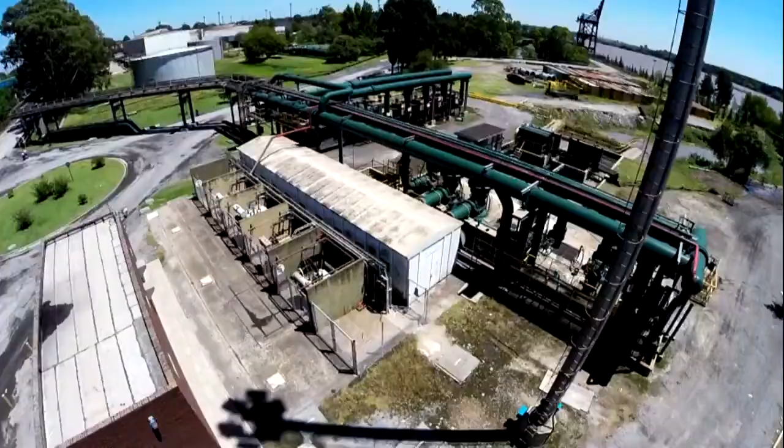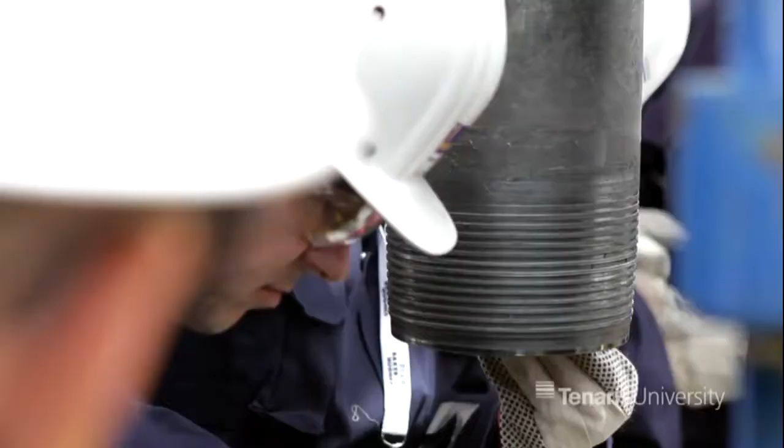As we said before, pipes are formed by the pipe body itself and the connections. Now that we have understood what the pipe body is, let's see what a connection is and which the different types of connections are according to the different applications. Basically, a connection is a mechanical assembly that joins two or more pipes together to form a string. The connections are mainly related to threads, and all the connections in OCTG pipes have a pin and a box.

But why is a connection necessary? If we had one single and continuous pipe long enough to reach the required depth of the well from the surface, there would be no need for connections. However, due to practical restrictions and manufacturing limitations, the pipes must be produced in a specific length range, and those pipes must be made up together through connections.

The connections must meet different requirements such as structural integrity, sealability response, clearance, and some mechanism to prevent the back-off to avoid the separation of the pipes connected in the string. Before analyzing the different types of connections, allow me to give you some basic concepts and definitions.

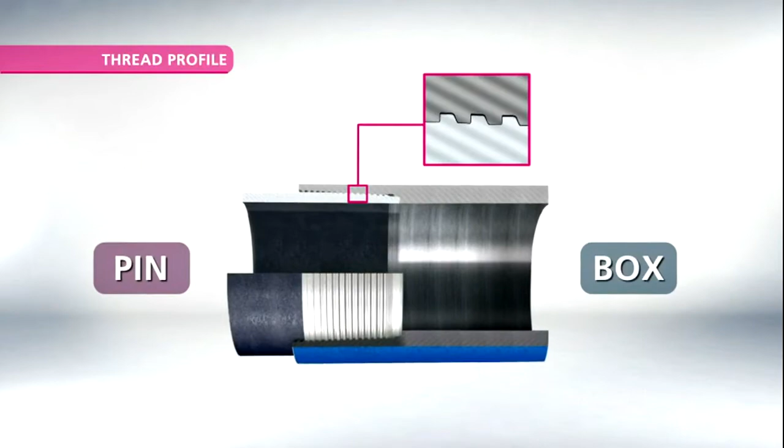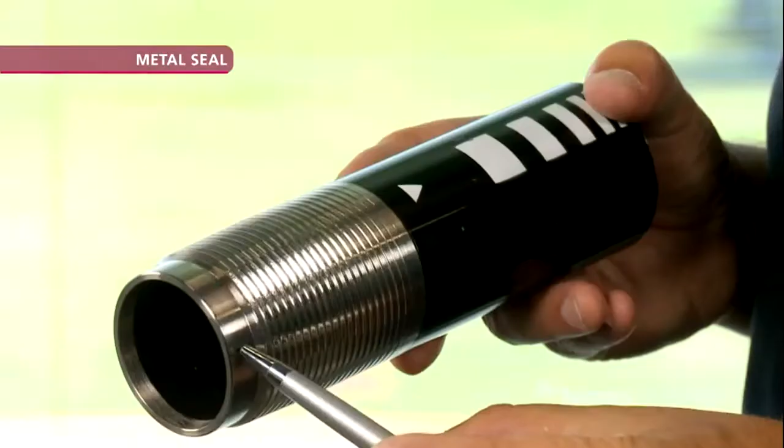Thread profile is the shape of the thread itself. Metal seal is the area of high pressure contact between the pin and the box that provides sealability, that is, it prevents gas leaks. Shoulder is the area inside the box where the nose of the pin touches it and is in full contact with it.

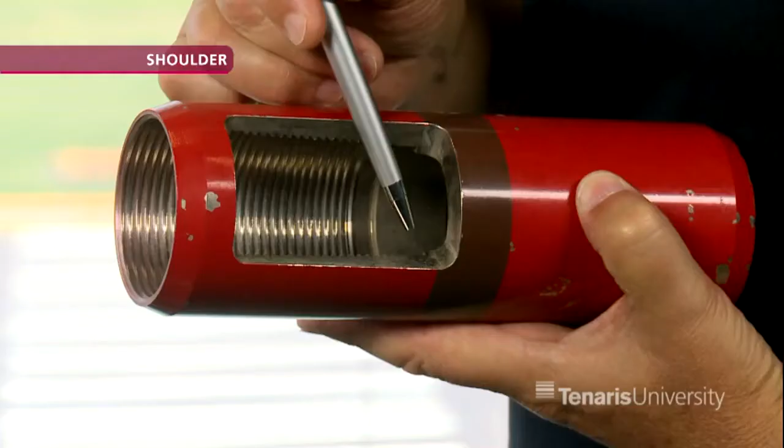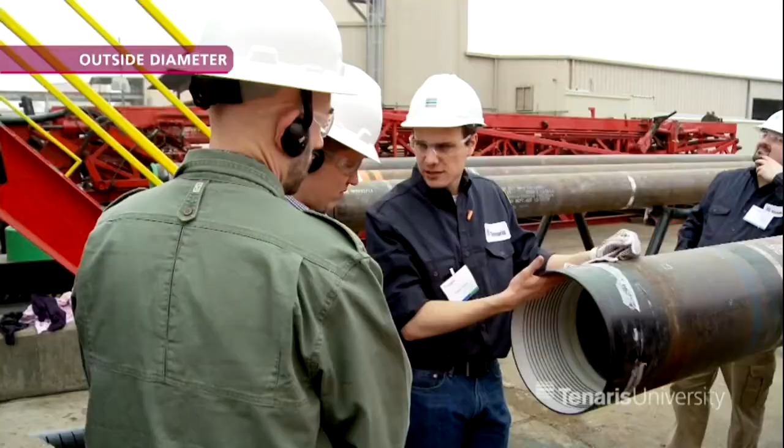Outside diameter is the external diameter of the connection. This diameter usually is different from the external diameter of the pipe body. Efficiency is the relation between the connection performance and the pipe body performance multiplied by 100, as the efficiency is expressed in percentage. The connections together with the pipes behave like the links in a chain.

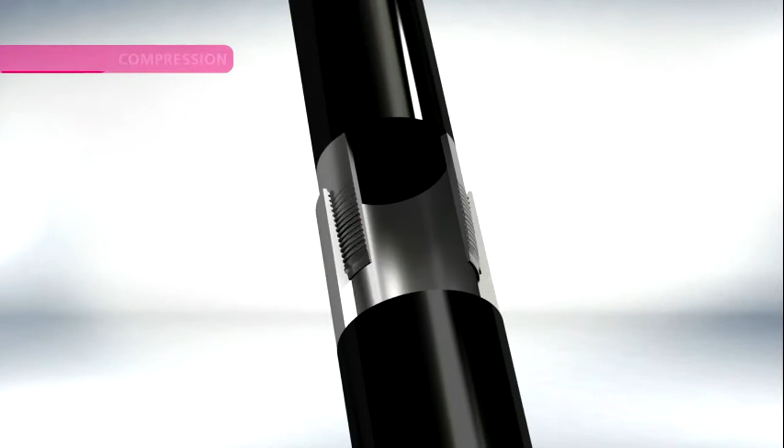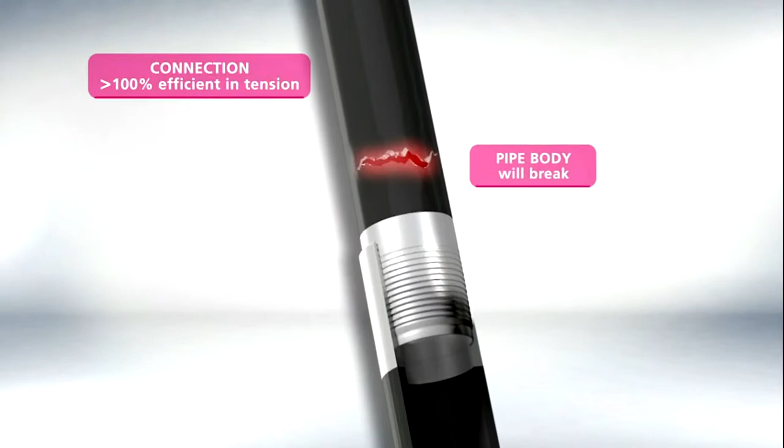The performance of the connection is related to its tension, compression, internal pressure, that is burst, external pressure, which is collapse, and torque. When we say that a connection is more than 100% efficient in tension, we are stating that the connection has a tension performance that is higher than the pipe body's. If we pull out such string, the pipe body will break, but the connection will remain intact.

On the other hand, when a connection is less than 100% efficient in tension, then the pipe body is more resistant than the connection. Therefore, the connection is the weakest point of the string, and if we pull out such string, the connection will break.

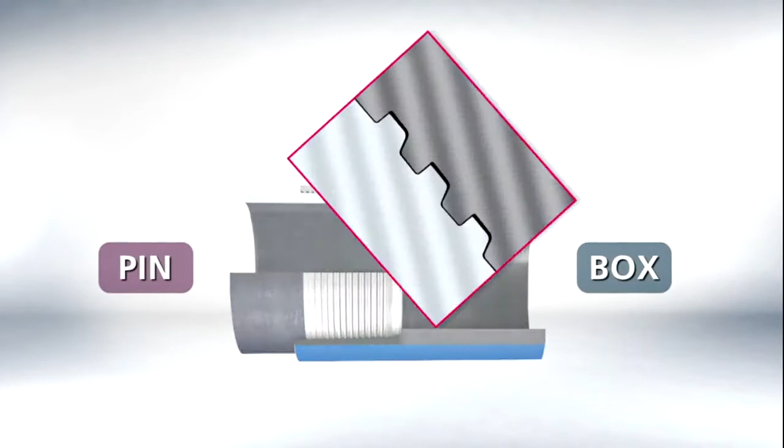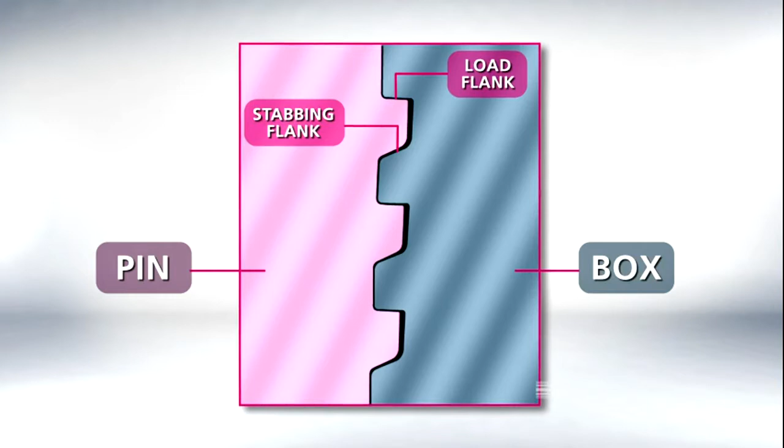The thread profile has different characteristics, such as load flank, which is the one that supports the weight of the string, the stabbing flank, which is required to allow the pin to enter the box in a smooth way, and the crest and root, which are the peaks and valleys of the threads.

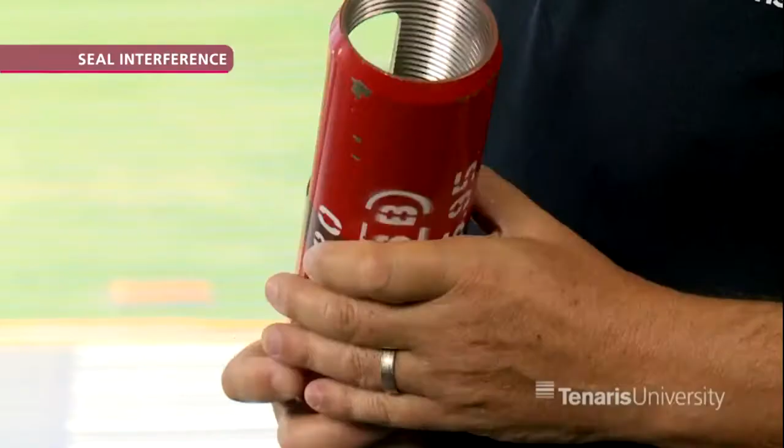And now, what do you think? How is the sealability assured by a connection? And the answer is through the seal interference. But what is seal interference? The connections are manufactured in such a way that the outside diameter of the pin is a little bit bigger than the internal diameter of the box.

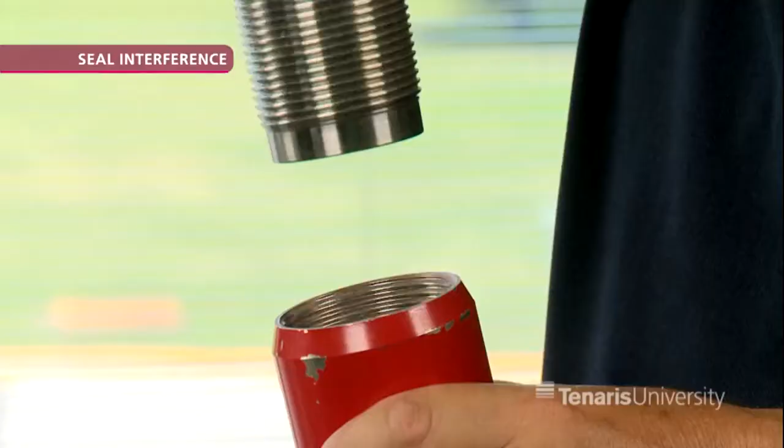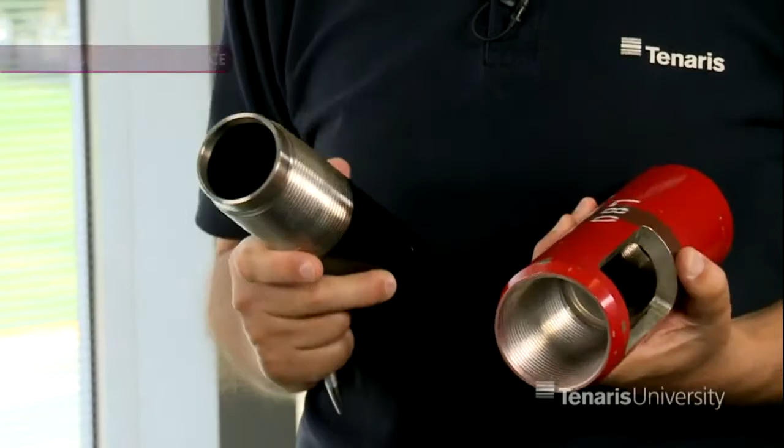When both parts are made up together, they deform elastically until a balance is reached. The pin is shrunk and the box is expanded. These deformations are always within the elastic limits. That means when the connection is broken out, both pin and box recover their original shape. Such deformations never reach plasticity. At this point, we can say that the interference has been reached and the metal-to-metal contact pressure has increased to promote sealability.

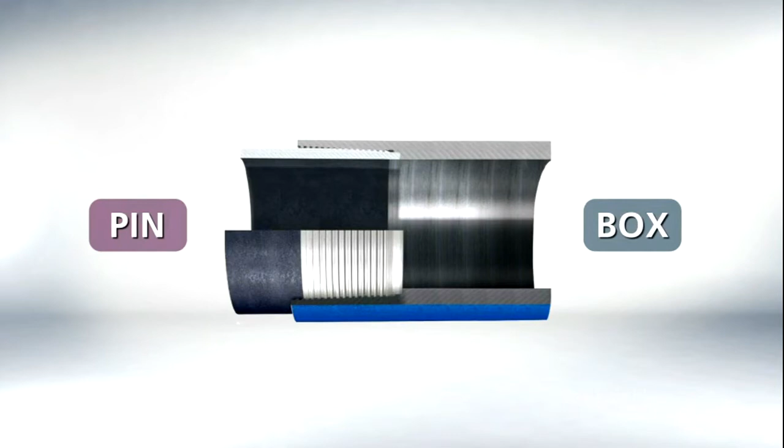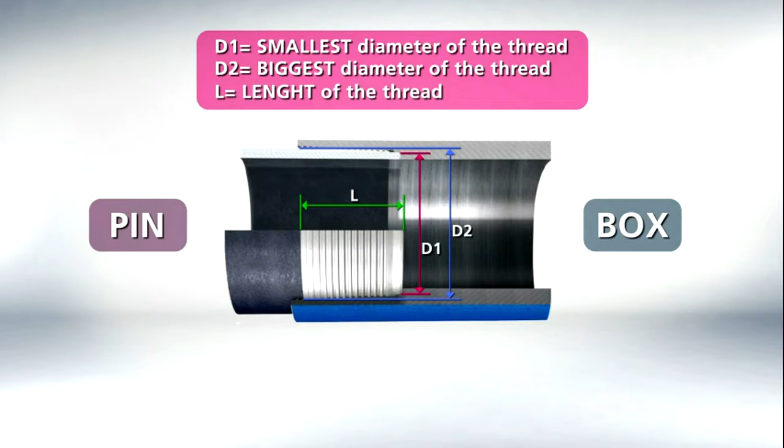Another characteristic of the threads is the taper. This represents the change of the thread diameter in a given length. If D1 is the smallest diameter of the thread, D2 is the biggest diameter of the thread, and L is the length of the thread, then we can say that taper is the diameter variation divided by length times 100. That is, taper is equal to (D2 minus D1) divided by L times 100.

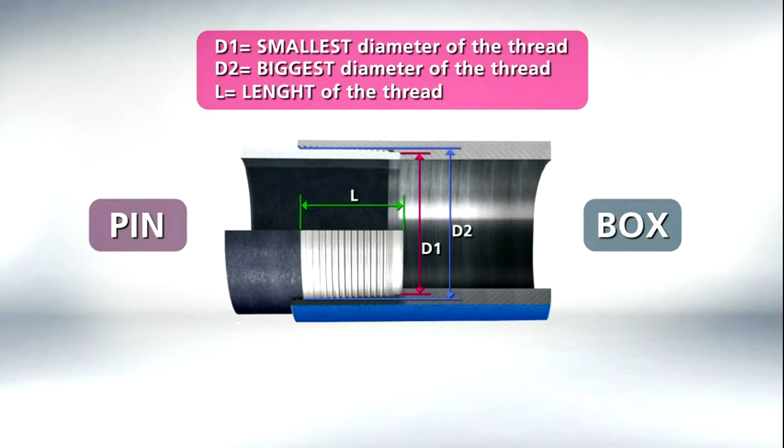Let's see this with an example. If D1 is equal to 6 inches, D2 is equal to 7 inches, and L is 16 inches, then the taper is D2 minus D1 divided by L times 100, that is 7 minus 6 divided by 16 times 100, giving a result of 6.25%.

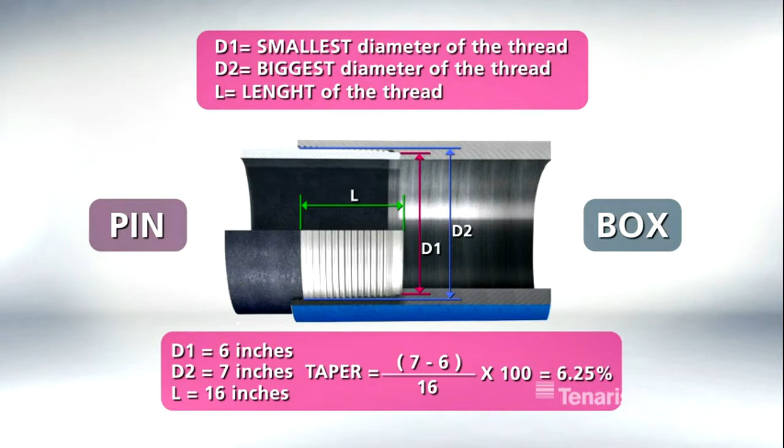Continue with the thread characteristics. Another parameter is the standoff. But to better understand this concept, we need to explain first what the hand-tight and the power-tight positions are. When we make up the connection by hand until the external surface of the pin comes into contact with the internal surface of the box, we have what is known as the hand-tight position. Let's identify the distance from the nose of the pin to the center of the box with the letter A.

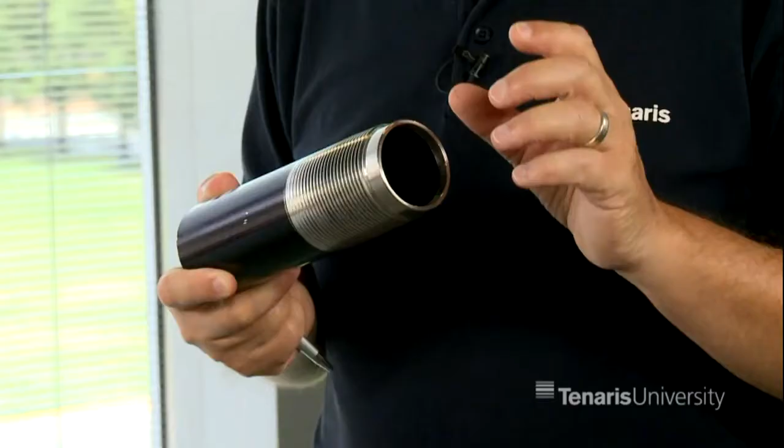If we continue making up the same connection with the power tong until the required torque is achieved, we will reach what is known as the power-tight position. And following the same nomenclature, we can identify this new distance from the nose of the pin to the center of the box with the letter B. Then the standoff is defined as the difference between A and B.

There are different types of connections. The first connections used in the oil and gas industry follow the API standards, particularly the API Spec 5B, titled Specification for Threading, Gauging, and Thread Inspection of Casing, Tubing and Line Pipe Threads. These connections are known as API connections, and according to the profile of their threads, they may be round thread or buttress. As these API connections are from the public domain, any API qualified mill can manufacture them.

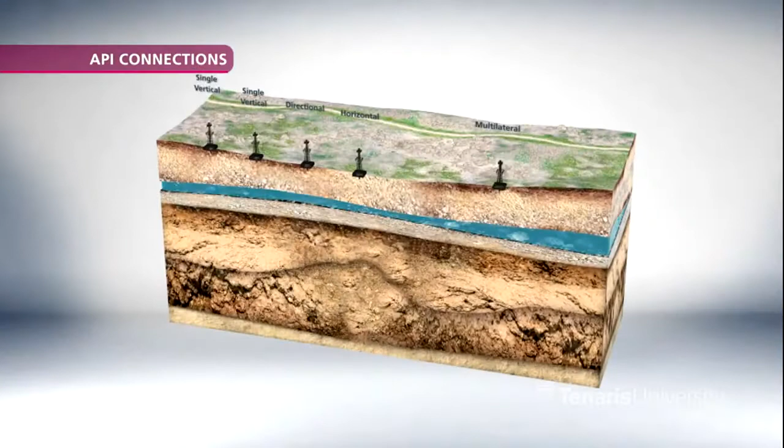Over time, following the increasingly complicated environments in the oil and gas industry, the drilling operation became harder and more complex. Today, wells tend to be deep, deviated or horizontal, multilateral, more demanding in terms of high pressure, high temperature, corrosiveness. And the connection had to be able to follow all those new challenges. For this reason, pipe manufacturers began to design new connections that exceeded the API requirements. And those new designs belong to each manufacturer, and they are known as premium connections.

Premium connections are proprietary, meaning that each manufacturer has its own designs, intellectual property rights, and product exclusivity. Just as a comment, bear in mind that premium connections as well as proprietary steel grades concentrate most of the R&D activities of the modern oil and gas industry, developing new products for sophisticated applications such as extended reach wells, drilling with casing, steam-assisted gravity drainage, shales, deep and ultra-deep wells, and so on.

To compare the behavior of this huge amount of new premium connections, API initially published the API RP 5C5 titled Recommended Practice for Evaluation Procedures for Casing and Tubing Connections. Later in 2002, the international standard ISO 13679 Petroleum and Natural Gas Industries Procedures for Testing Casing and Tubing Connections appeared, and this is today the most utilized standard to qualify premium connections. And finally, there is another type of connections for some specific applications known as connectors.

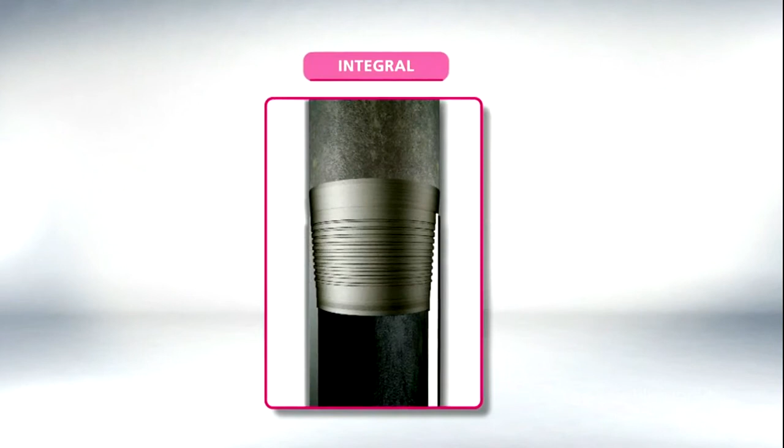Summarizing, based on all the above, we can characterize the full family of connections as belonging to API, premium, and connectors. Then, API connections can be either round thread or buttress, and on the other hand, premium connections can be threaded and coupled or integral, with integral being those connections where the pin and the box are threaded on the same pipe, and there is no need for any coupling to join two pipes together. The integral connections can be classified as flush, semi-flush or near flush, and upset. Let's see the main difference among all these connections.